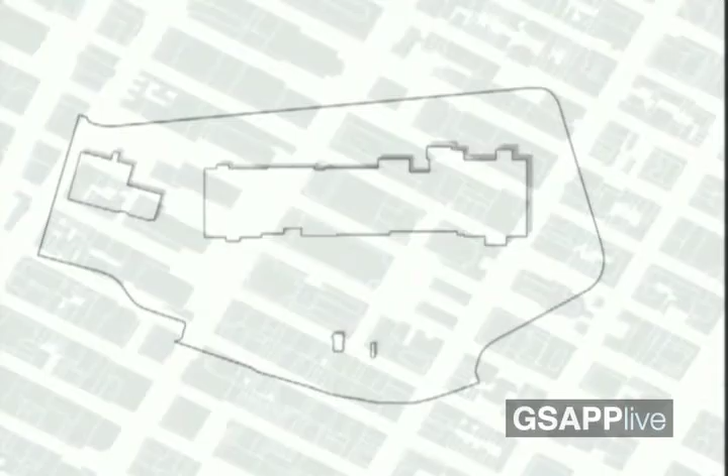But it was never really successful for a number of reasons, having to do with the micro-location of this mall in relation to a highway exit. So it kind of floundered for a while and then closed its doors in the 1990s. When we entered the picture in early 2004, the owners of this building, New York City-based developers, freely admitted that they were land banking - meaning they claimed the property for tax purposes, as a write-off, and were fine with just waiting and having it sit there, not doing anything. It was obviously perceived as a problem for the community to have this very large, prominent site sit there, dead, nothing happening with it.

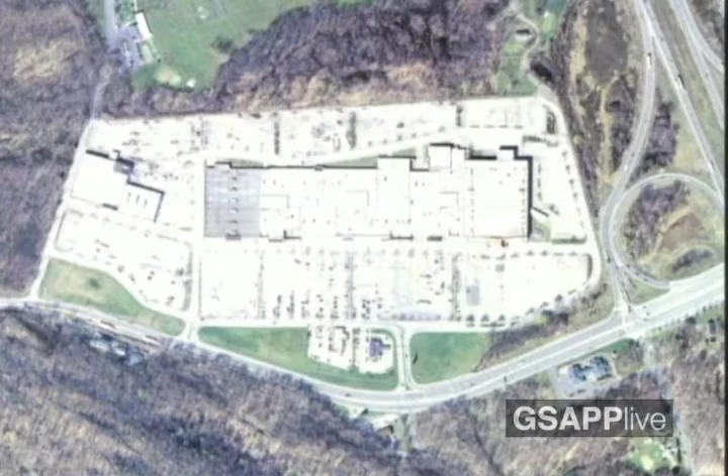But when we started looking at this property, we decided not to be critical of land banking, but to accept it as an opportunity - to look at this period of nothing happening as a time where other things, the space, can be a temporary location for other unplanned programs to take place in the meantime.

In fact, hanging out there a lot in the parking lot of this mall, we soon found that already there were a lot of unplanned things happening there - like this bus service serving the supposedly dead mall, somebody waiting for a bus here. Another bus stop that also doubled as a dry cleaning business, toilets in the parking lot, RVs, rigs, homes, other miscellaneous activities going on. And then this guy who was mysteriously riding around his golf cart picking up trash.

There goes a hot dog truck. And then on the weekend there was this amazing flea market going on in the parking lot, but also in the repurposed anchor store here - this is the KISS memorabilia stand you see there.

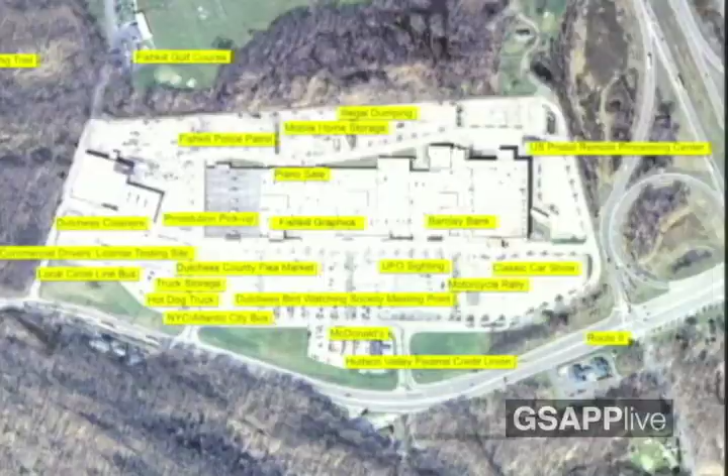We started mapping all these activities we found there, and then diagrammed the different rhythms of the mall, starting with the picture of health when this thing was fully operational. You see a pretty good, even heartbeat there on the electrocardiogram.

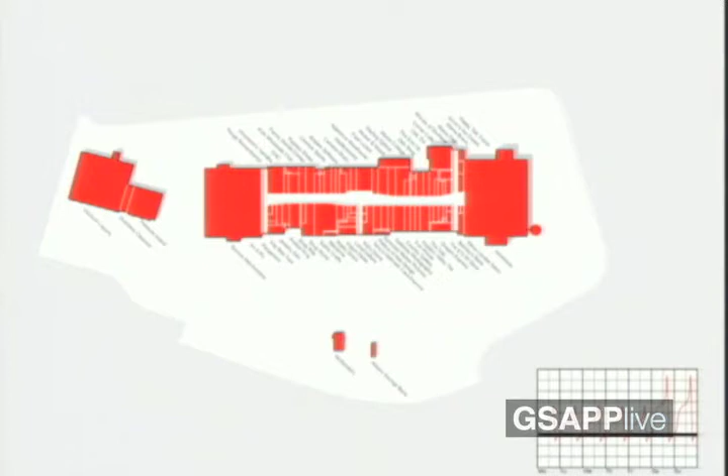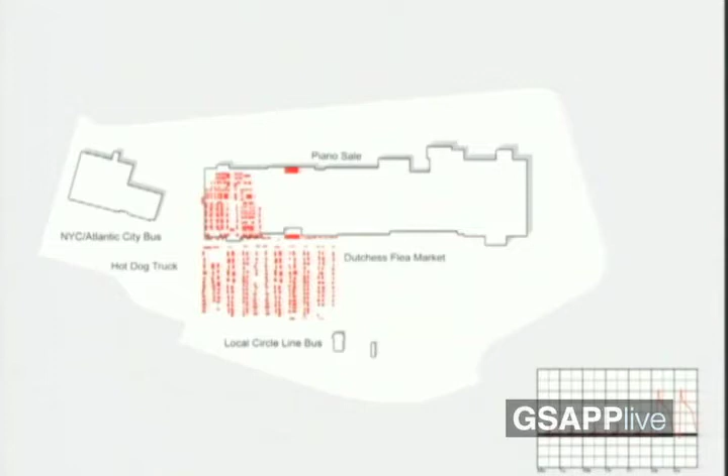Then we mapped current programs - pretty weak pulse, just very few businesses left. And then we looked at the temporary programs, this flea market, and you see how it picks up there on the weekend. We also mapped the illicit and illegal programs going on here, and there's no telling when they occur - so this is total arrhythmia that you see in the electrocardiogram.

After looking at this from afar, we identified people, local constituents, people who use the space and have some interest in it, like this guy who runs the hot dog stand. He notes that the mall parking lot had become a sort of makeshift truck stop, so truckers pulled in and spent the night there, and he set up his little hot dog business to sell them food - he started a little business out of the conditions.

So we talked to him, and to a lot of different people, both on-site and off-site - developers, different interest groups, and so on. This was really not so much about romanticizing the everyday practices, not to only have this sectarian view of the place, but to really understand all the actors acting on this site, to get a full picture of who's a player here, either on the larger scale or the smaller scale.

We really saw this as a kind of good thorough detective work, right? Interviewing people, but also just listening, hanging around, looking for clues, and suspending judgment as long as possible to get some situated knowledge, to understand the site.

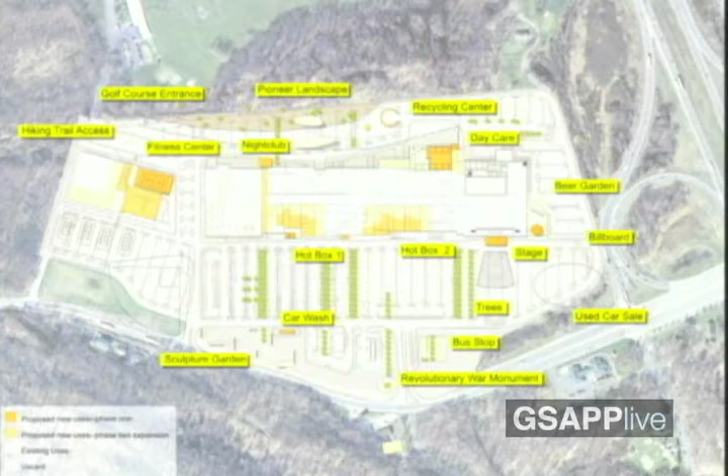I'm not going to walk you through them, there are a lot of these proposals. Some of them are really very short-term, cheap interventions to help this use during this temporary phase, the land banking phase - like basically office infrastructure for small businesses to colonize the structure, the mall structure from outside in.

We saw there was a graphic design business that started doing that, and we thought this would actually be a very useful, very cheap intervention to help that kind of colonization of the structure from outside in - cheap stuff that tries to intensify existing dynamics to get some sort of use out of it.

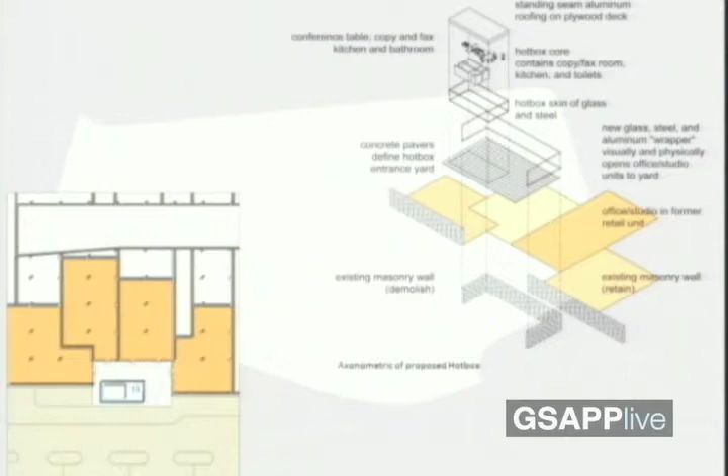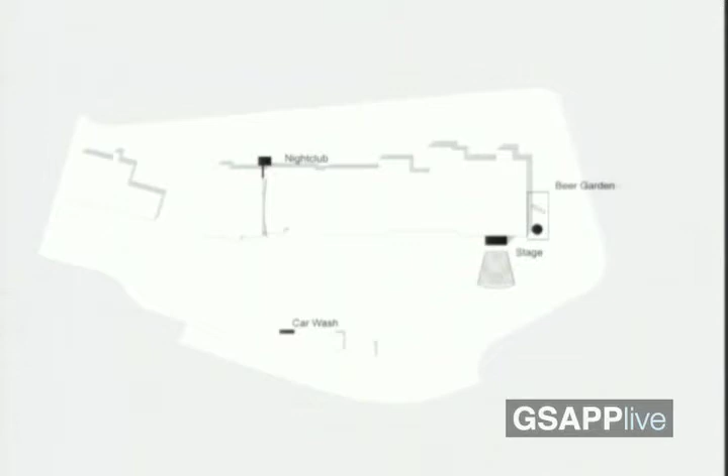There were other proposals that were just capitalizing on the temporary mess, or exploiting this temporary mess, like a nightclub and things of that sort, that just took advantage of the fact that there are no neighbors around here.

And then a third group of proposals that were building on this sort of casual, mainly car-oriented community uses around there - there's an existing drive-through McDonald's, an existing drive-through bank, and so on. So we added, enriched these kinds of everyday programs.

But again, many of those proposals were designed for the limited period of land banking, a couple of years. And our thesis was really that this sort of in-between time sometimes allows programs to happen, but also buildings to happen, that otherwise might not have a chance - under normal conditions, these things might never happen.

And these things that happen in the meantime can also disappear after the lab phase is over, so to say, but they can also influence what happens after this experimental site - they sort of can change the DNA of a site. And so from there, we move to the next project with that thought in mind.

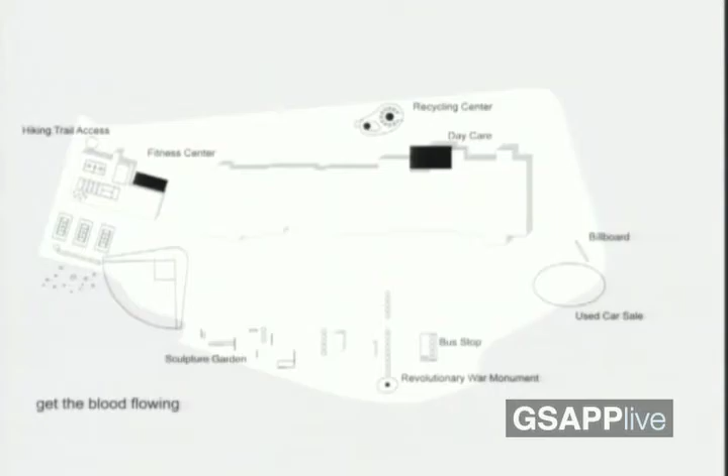So the next project is Lent Space. It's the temporary sculpture park in Soho that Gavin mentioned earlier. The site might be familiar to many of you because it's a full block, as you can see here.

The landowner's problem was that the site was zoned for manufacturing, so there had to be a change in zoning, which, as many of you probably know, in New York can be a very long and multi-year process. While the process to change the zoning was underway, the landowner thought that in the meantime, during this 3 to 5 year period, he might as well put some sculptures here and also incidentally get a tax break.

So the landowner approached the LMCC, the Lower Manhattan Cultural Council, a downtown arts organization that's quite active in the city. Probably many of you are familiar with it. The LMCC runs a number of initiatives, including Swing Space, a program that temporarily matched artists in need of studio space with vacant office space in Lower Manhattan.

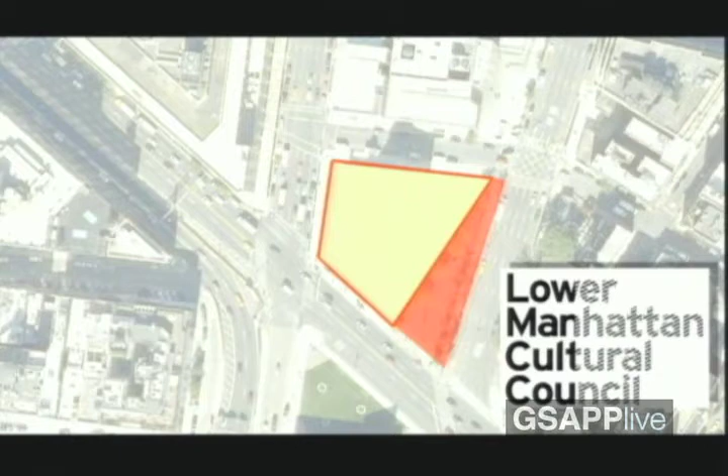Anyway, the LMCC curator, Adam Kleinman, a really brilliant guy, wasn't too excited about the idea of temporarily decorating a development site. But nonetheless, one day he called us and asked us to prepare an estimate for creating some gravel paths on the site to make it accessible.

We didn't give him a price for the gravel paths. Instead, we introduced him to our Dead Malls project, really to make the point that one could do so much more here than just putting down some gravel and a sculpture. Here was an opportunity to pull off an interesting project in the meantime, an opportunity to use a niche in time to introduce a project and a program that just wouldn't have a chance in this part of the city under the current conditions of ownership and with the current realities of land values.

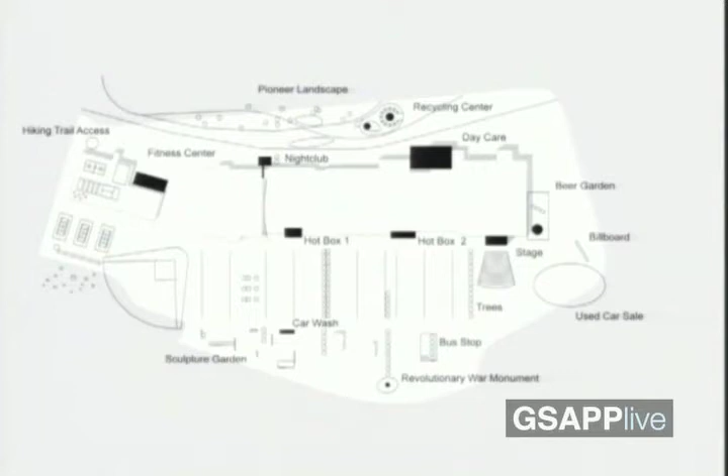So as Tobias mentioned before, our Dead Mall project here really had a funny afterlife. It really lived on in theory and in practice, and we used an in-between time to incubate new programs and new forms of public space. So we somehow together turned this project into a temporary public space, plus performance space, plus sculpture park, plus tree nursery. Sounds a little complicated.

So here's the site. Next to the site here, you see this little plaza. It's called Juan Duarte Square, named after the founder of the Dominican Republic. You do know that 6th Avenue is kind of the Avenue of Americas.

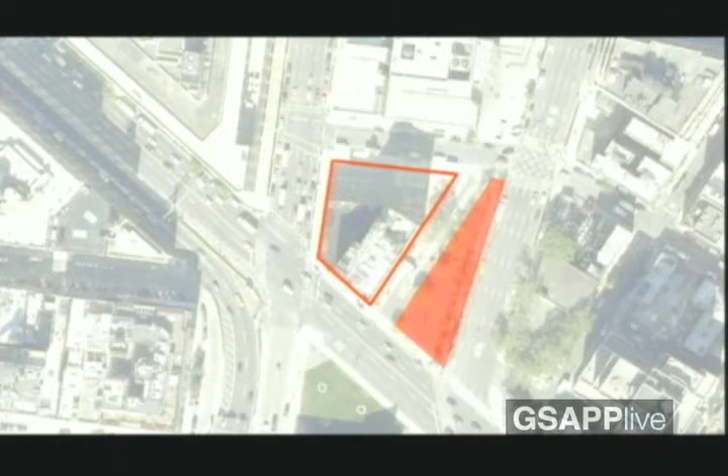And in between, there's actually this little street that had recently been demapped when we started the project, meaning that although it looked like a public street, it no longer was one. So it somehow actually belonged to the landowner. We're still not entirely sure how you buy a public street in New York City, but it can be done.

A problem that we encountered at the beginning of the design process was that the landowner insisted that the site had to be fenced in. This was basically a legal requirement related to the landowner's insurance. And while generally they were very open to our ideas, there was absolutely no question about whether or not to have a fence. This was a huge problem for us because, as you might imagine, with this fairly small site and a few sculptures inside and then this big fence around it, it seemed a little weird, like some kind of art zoo. Also, the budget was such that a new fence would have actually killed most of our budget.

So after fighting against the fence for a while, we actually decided to make it the most important element of the design, and design a fence that would be permeable and active, a center of activity rather than a border, an object that blurs the boundaries between inside and outside.

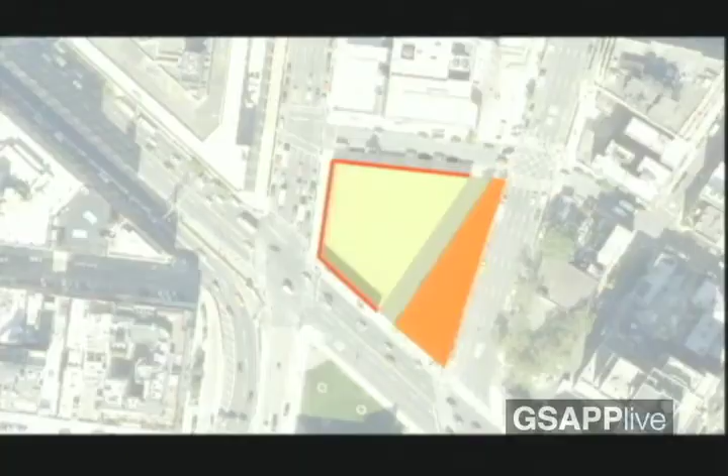So we decided to keep the existing clearly provisional chain link construction fence on 3 sides, and facing the sidewalk toward Duarte Square and the demapped street, we basically got rid of it. On this side, we replaced the construction fence with a new element pulled back from the curb of the street to the old building line, constructed out of marine grade plywood, a material clearly different from the chain link and suggestive of furniture.

And we made it operable. We made it possible for people to actually move the fence.

So here you see the diagram. It's actually a little light, I hope you can read it. When the fence is closed, all 3 sides have that chain link fence, and this wood wall is facing the square as a kind of facade or billboard, giving an address to the project, a street address on a demapped street.

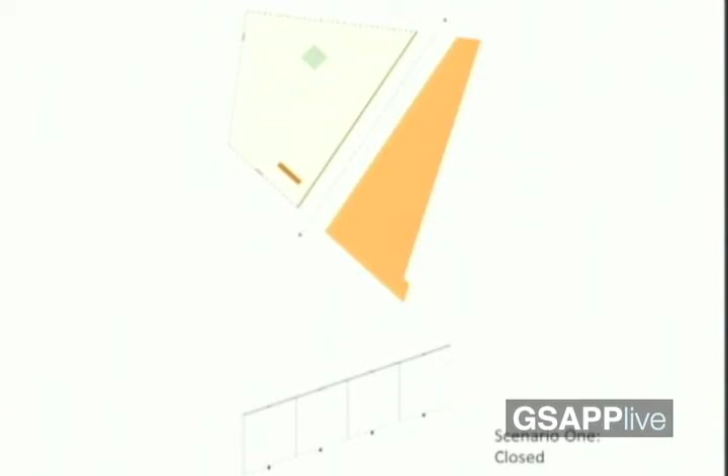And here's the fence on an everyday basis. Some of the fence elements are open to allow these kinds of shortcuts through the site between some of the workplaces and subway stations and so on.

And here it is with the entire side open, blurring the boundary between public space and the privately owned public space, and also creating a series of compartments, these kinds of small gallery spaces.

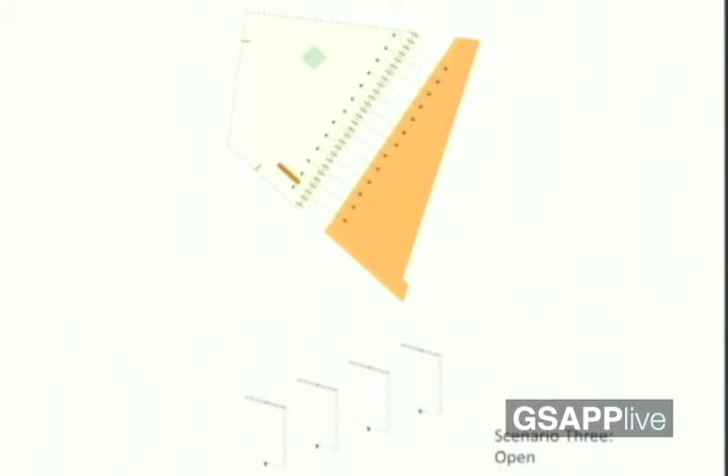So here you can see it in action. We just opened one door. We actually made a bench on one side of the fence, making the object a little more public in that it's no longer clearly identifiable as one thing, like is it a fence, is it a bench, but something that can really be used or appropriated in a number of different ways.

So it could be used as a larger sitting space. You can also move them a little closer, or have the bench face inside or outside. That's Adam Kleiman, our client.

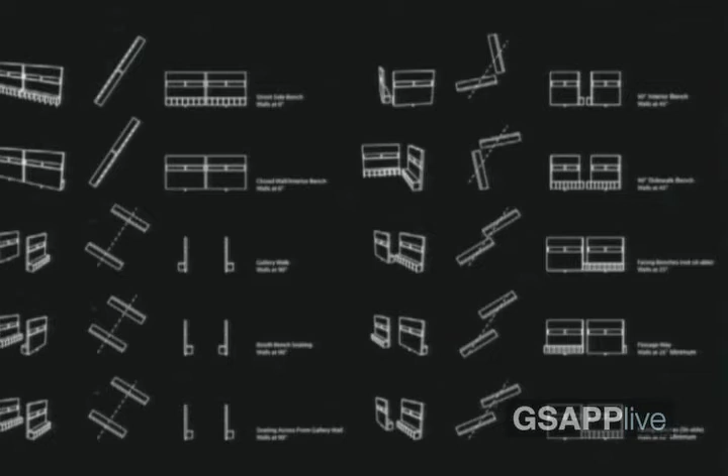Or open the whole thing up. You can see now when those doors are perpendicular to you, it almost dissolves and disappears. In addition to being a fence, it can now create all kinds of social spaces for people to hang out and to sit and to play.

And then these boxes are actually a movable park and tree nursery. What we realized at the outset of the project was that in order to create some use value for the many people who worked in this area, this place really needed some shade trees and generally some vegetation. But it seemed wrong to us, as it was a temporary project, to plant trees and then after a couple of years just tear them out and throw them away, right when the trees would have grown and be big enough to produce some nice effects.

So we started working with a horticulturalist to see what would be the right way to plant trees. We learned that if you want to plant trees and then move them after a couple of years, it turns out that planting them in boxes like this actually works best because the roots are confined. And then we got a couple of trees donated by the Parks Department.

The Parks Department also taught tree planting workshops on this site as part of the so-called Million Trees campaign. In addition, we tried to find ways to densify the park by borrowing trees, by providing a tree nursery, so small trees were to grow on the site for a year and then be moved out to become street trees. The idea of temporarily storing or borrowing trees really made a lot of sense to us, given the limited lifespan of the project.

Okay, so now we would like to talk to you about Holding Pattern, our PS1 project, MoMA PS1 project. Most of you probably know, but for those who don't: every year, MoMA PS1 commissions an architecture firm to design and build a setting for big Saturday afternoon parties called Warm-Ups. The program essentially provides seating and shade for the 6,000 or so visitors that come to these events every Saturday between June and October. You have to build everything yourself in 4 months.

This would probably be a good time to point out that you're hearing from the 3 principals of Interboro here, but projects like Holding Pattern couldn't happen without a lot of help. We had an enormous team of amazing volunteers for Holding Pattern. We can't mention them all, but we'd like to acknowledge Rebecca Beyer, the project manager, Andrew Costello, Janessa Fry, Trevor Lamb, Kathleen Cahill, our graphic designers Thumb, structural engineers Buro Happold, and illustrator Lester Gonzalez.

So back to Holding Pattern. It's a temporary project, and here are the warm-up parties — I'm sure many of you have been to some of them. When we first started to think about what to do, we started to think: what happens to all this stuff when the project is over? Does it get thrown in the garbage? So our first thought was, it probably makes sense to recycle.

Might there be a design? Could we design and build something that could be put to a different use once Warm-Up is over? The second thing we thought about a lot was that PS1 is located in Queens, which is the most diverse, the most vibrant, the most exciting part of New York City — maybe one of the best places in the world, we'd argue. MoMA PS1 does a great job of doing outreach to the neighborhood, and people who live there get to go there for free. But on some purely architectural level, the 16-foot concrete wall that surrounds the courtyard can be perceived, especially by people around it, as something that's not entirely welcoming, right?

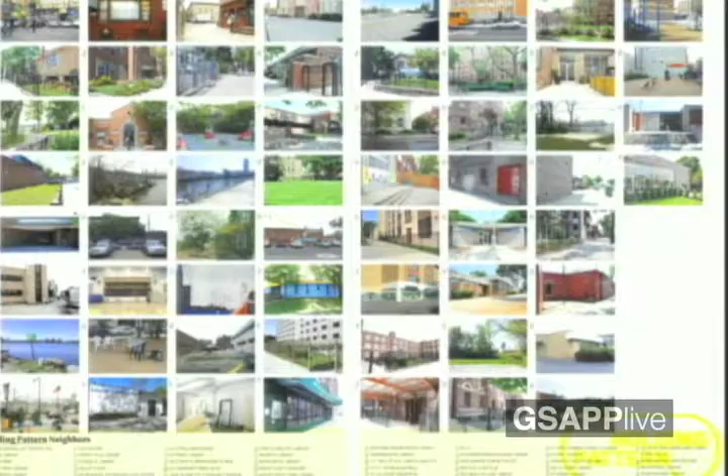At the end of the day, these are the objects, this big collection of stuff: trees, lifeguard chairs, stages, ping pong tables, rock climbing walls. Here are some pictures, and this is actually a picture of every space that's going to be improved by stuff from Holding Pattern. There's over 60, and here's a map of where everything is going to go. By the way, tomorrow is the day we're going to deliver all of this furniture, the rock climbing walls, the lifeguard chairs, everything to the neighborhood.

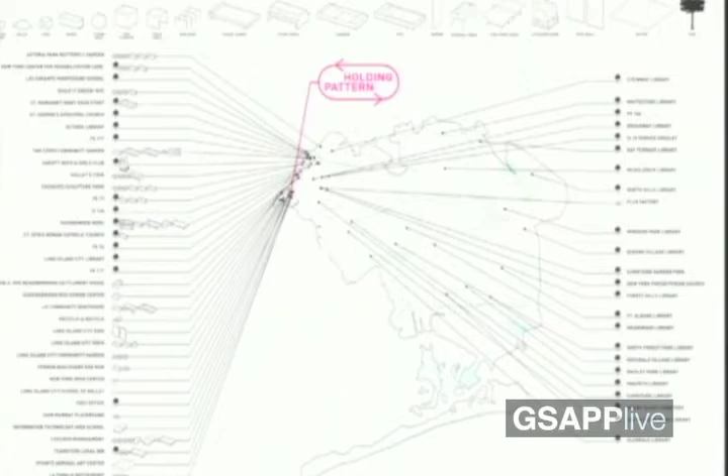Just to give you an example of some of the spaces, you'll notice there's a lot of trees, a lot of people wanted trees. So here are some of the spaces we're going to improve with trees. We partnered with the New York Restoration Project, and they generously offered to help us deliver and plant trees in places like the New York Rehabilitation Center, these kind of barren parking lots. In some ways, the project is really a neighborhood improvement project, which is how we like to see it.

So this is an illustration we developed to represent the project. Here you can see the museum, the old school building, its courtyard, which you're probably all very familiar with. We show this in the context of the neighborhood, and we think of the project as having three phases.

The first phase is when people ask for stuff, as Dan mentioned. We quoted these requests here in yellow, so for example, over here you can see we need ballet mirrors for our expansion, or we could use a stage for our b-boy workshops. In the last phase, the furniture and other stuff requested by different organizations goes out to their owners, so to speak, which, as Dan mentioned, is going to happen tomorrow. This future phase is shown by these little clouds. For example, up here you can get a glimpse of the mirrors in use by the Long Island City School of Ballet, and over here is the b-boy stage in use on the roof of the 5 Points building.

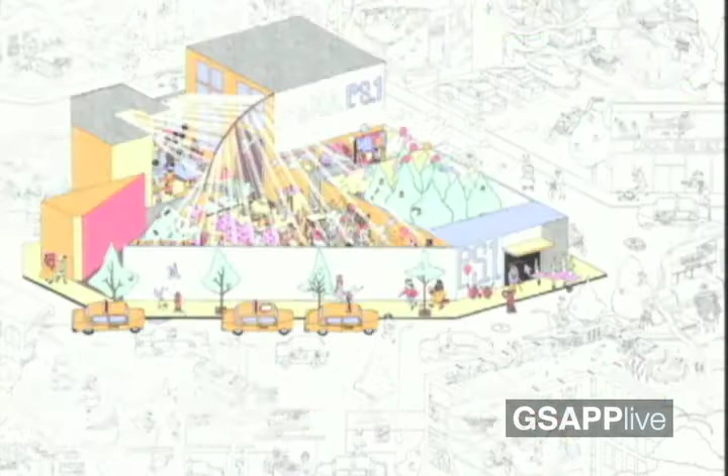And then this is what happens in the meantime during warm-up over the summer. So all the stuff, the trees, the furniture, the mirrors, and so on, are used in the courtyard.

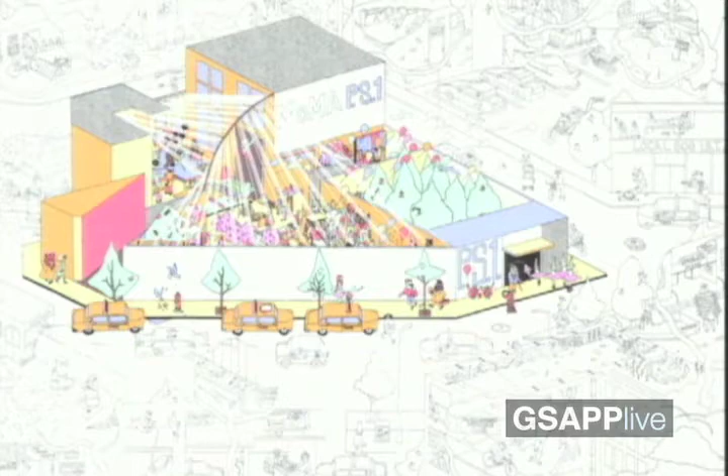With this approach, we radically expanded our client group from one client, the museum, to 50 clients that included the ballet school, 5 Points, the Boys and Girls Club, and so on. Holding Pattern really operates like an urban design project, developing an environment that responds to multiple, very different, and sometimes changing desires, something that a fixed piece of architecture could never do.

We sometimes liken our approach to that of the Iron Chef, of the beloved franchise TV show, as the Iron Chef is given a bunch of ingredients and under tremendous time constraints, and under the careful watch of a live audience, is challenged to make an amazing meal. We worked with a set of materials and objects selected by others, like the mirrors and the trees, and sought to make an interesting environment.

We used straw bales to create planting beds and backfilled them with mulch. We planted the trees in a grid, but the planters are organized more like a maze, evoking more traditional hedge gardens, and the feeling and smell of the space is very distinct, damp and organic like a forest.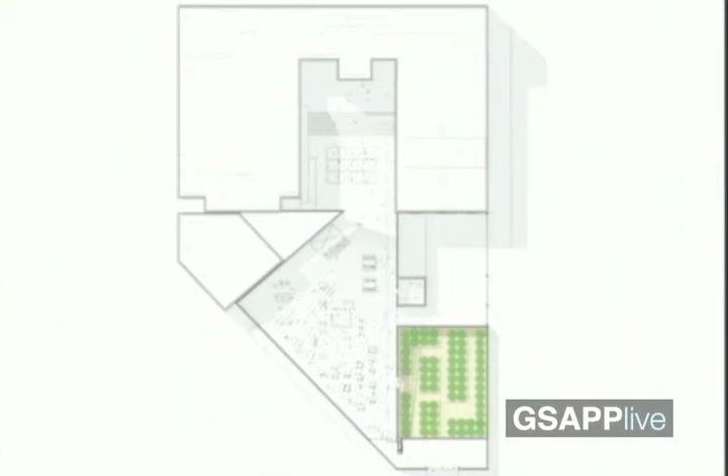And then onto the main courtyard, the largest space, which Barry Bergdoll referred to as the public rec room. This is actually a funny photo, taken at the threshold between the tree room and the rec room on the left.

This is where most of the items are placed and where people interact with them, like the stools, the picnic tables, the bike stand, and the ping pong tables. The majority of these pieces worked kind of like a family, although we did buy a few pieces off the shelf, like those ping pong tables.

And here you can start to see it all being used. We developed a labeling system with the graphic designer's thumb, our frequent collaborators, and each item got what we called a museum label describing the piece's so-called provenance. That was coupled with a grid showing where all the items go, and we just used a black marker to circle the final home of each piece.

We also created these 'hold for' tags to make visible that these pieces were being held for someone else, and we used a branding iron to burn in the Holding Pattern logo. You can see the space filling up on the warm-up day.

The Mies-inspired chaise lounge, the misting stage, the lifeguard stand, the rock climbing wall - actually really popular with that age group, incredibly - the sandbox, the chess tables, the foosball table. We also had 24 purple leaf plums in the main courtyard that we put in containers.

And so here you can see it in full action, with the furniture being appropriated and moved around in all different ways. So here you see the project being used primarily by two audiences, the museum audience and the warm-up audience. But we also invited organizations in the neighborhood we worked with to make use of MoMA PS1's courtyard for programs of their own making during the summer months.

The events included b-boy workshops, ballet workshops with the Long Island City School of Ballet, readings with the Queens Library, a senior citizen summer - oh, that actually we didn't do, excuse me.

Quilt making workshops with the New York Irish Center. So Dan mentioned Eric of the Long Island City School of Ballet. Here he is in the studio. You remember he needed mirrors.

So here are the mirrors in the installation, and here's a photo from the event we co-organized with him called A Brief History of Dance. And that's actually where the mirrors will go.

Queens Library did a series of readings. You can see here the quilt making workshops with the New York Irish Center, the bike repair workshop. And then just yesterday, we had the Long Island City Neighborhood Expo, with a number of different neighborhood organizations involved.

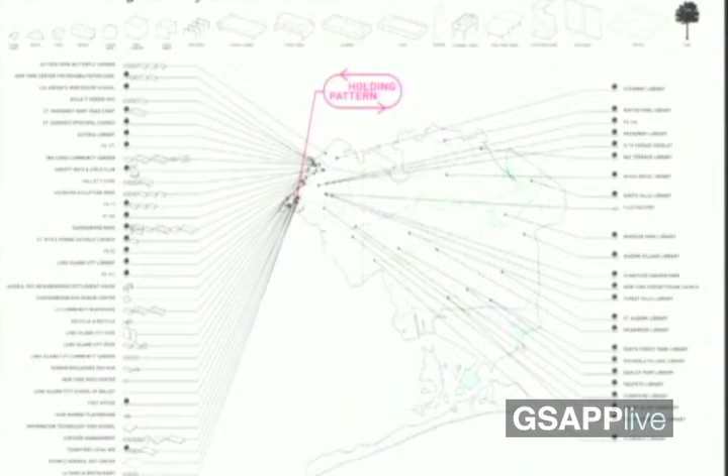Lastly, we developed this newspaper, again in collaboration with them, which introduced our clients and their organizations, and showed what they asked for and where it's all ultimately going, which will happen tomorrow. This free newspaper was available at the museum, so visitors could learn more about the project, but it was also distributed into the neighborhood, to open the museum to the outside and blur the boundaries between it and the surrounding neighborhood. Here you see some images of those pages.

Last but not least, let's talk about the structure. As you probably know, the courtyard of MoMA PS1 gets extremely hot in the summer, and almost the only programmatic requirement for GSAPP is to provide some shade. To do so, we devised this canopy structure.

It's a simple and inexpensive, albeit kind of accidentally heroic structure made out of ropes and fabric, polyjute, which is a lightweight landscaping fabric. And it has this funny shape.

It's not something we designed out of the blue, but it's derived from the courtyard as it is. Part of what makes warm-up events so interesting is the eccentricity of the courtyard. It's sort of a weird party, and part of that weirdness has to do with the oddness of this courtyard—the fact that the best seat in the house is basically the terrace of the neighbors who are planting their tomatoes up there is somewhat strange, for example, among other eccentricities in the architecture of the courtyard.

So when we started thinking about how to provide shade for this situation, what we didn't want to do is place a beautifully designed object within this strange courtyard, maybe a piece of architecture that might get into people's way. You saw the courtyard layout with these pieces of furniture, very much about interaction and people moving stuff around, so we didn't want to get in the way of that, and we didn't want to touch the ground.

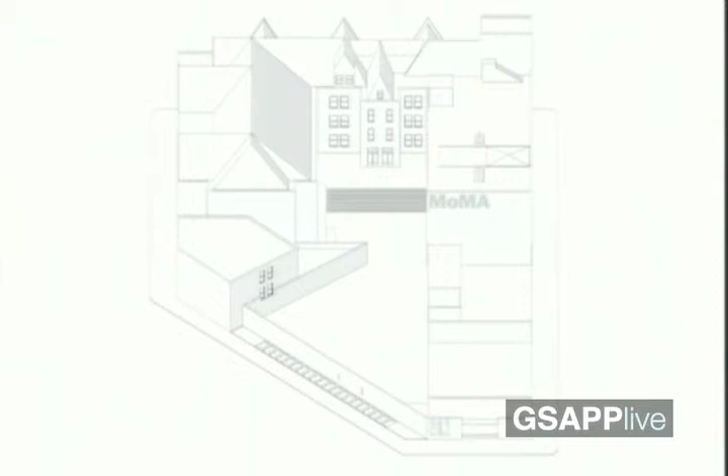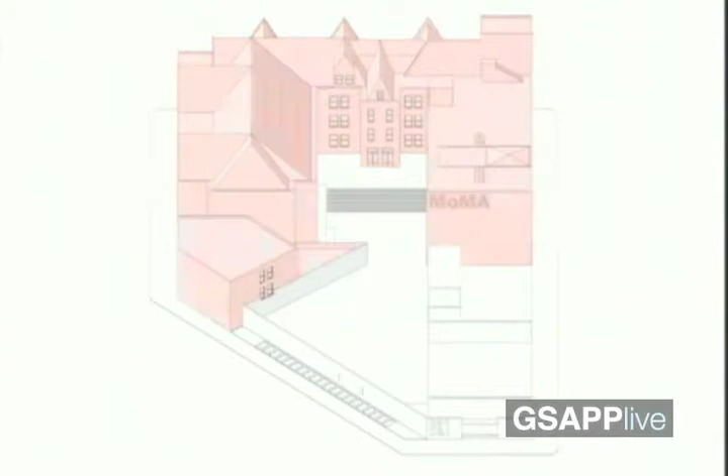So what we started doing is really just connecting the edges of the courtyard as it already is. The funny shape of this courtyard really wasn't anybody's design decision, but the result of many circumstances and decisions over the years. You just see here the grid, which is cut off at this corner by Jackson Avenue. There is the old school building, and there is this neighboring parcel that sticks right into the courtyard with its terrace.

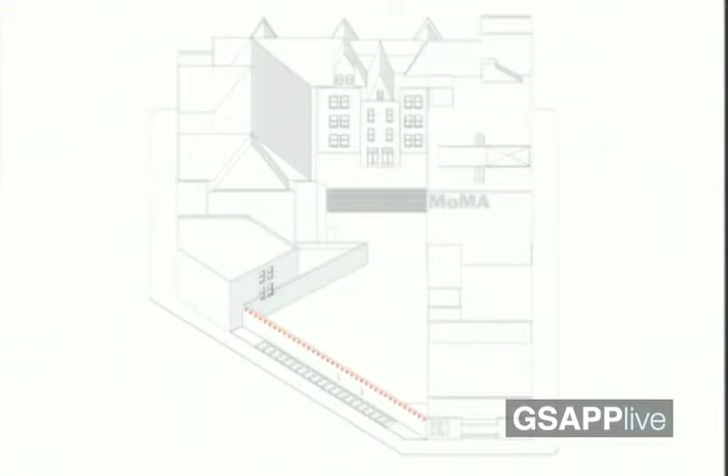And again in the 90s, there was this decision to put up this 16-foot wall around the courtyard. Actually, in this wall there are open holes, 38 holes, two feet below the top edge of the wall, from the concrete formwork. We decided to thread ropes from these 38 holes over to the building itself, just as the simplest way of providing a roof for the entire courtyard.

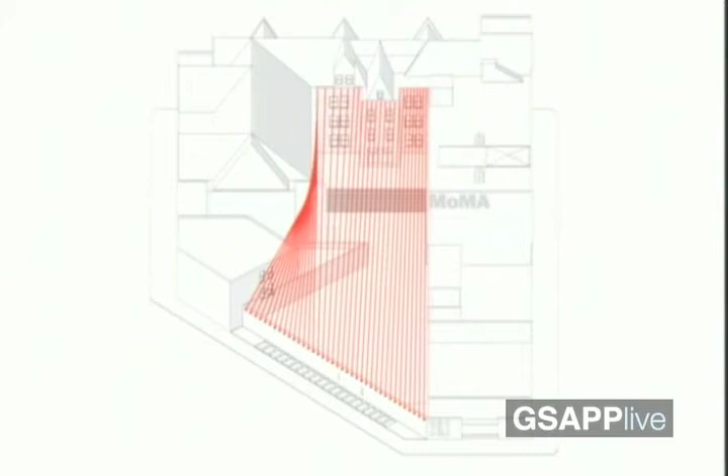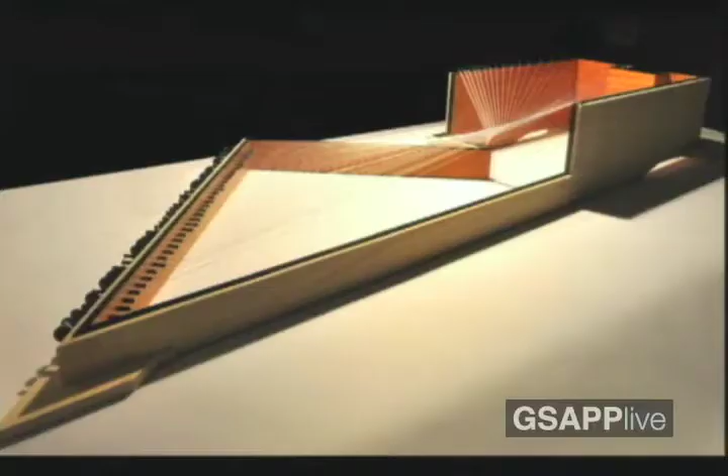Obviously we didn't want to put a roof over the neighbors, so we had to pull that in at that point, resulting in this shape, this hyperboloid surface that is directly developed out of the edge conditions of this courtyard. Here you see our first model, the harp, just bringing these strings across from the edges of the courtyard. This is a rougher working model we had going, but you see in this image the beauty of this shape, a sort of 50s aesthetic that came out of this simple operation of connecting the edges. We really like this shape in that it's made out of lines—little bit sagging lines now, but in the model, straight lines.

It's made out of lines, and it has this hyperbolated surface, which isn't the result of some algorithm, but simply connecting the edges.

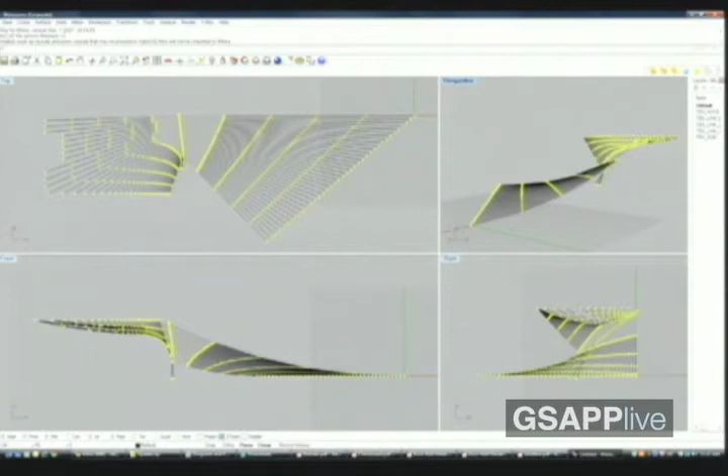This was actually the parametric digital model that we worked on with our structure engineer. It was an interesting challenge to find the right tension and the right placement of these ropes. The edge conditions of the building can have different loads, and each rope, as you can imagine, has different length. So a parametric design came in very handily to do this.

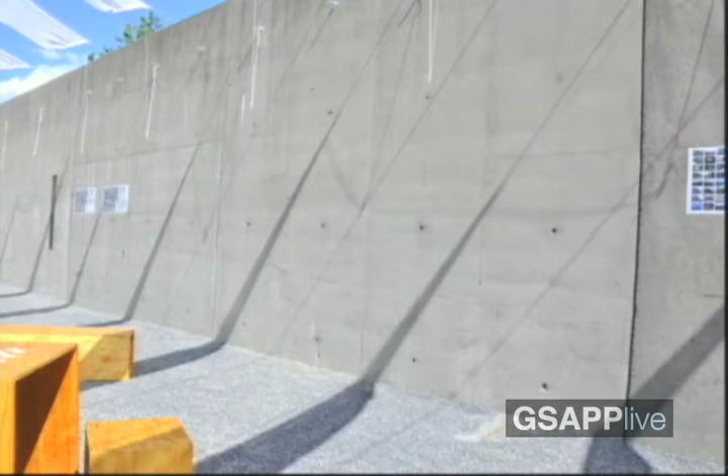So there's this little hint of what happens on the inside on the outside wall along Jackson Avenue here, over these porta potties—you see a little bit of what's going on in there. Here they come across over the wall, and there you see the fins that are attached to these ropes.

But then the fins, the ropes come out on the inner courtyard side of the building and go across to the parapet, which you see here. This is a photo from the roof—you see the bridge down here, and then the ropes going up to the parapet. You see the railing there.

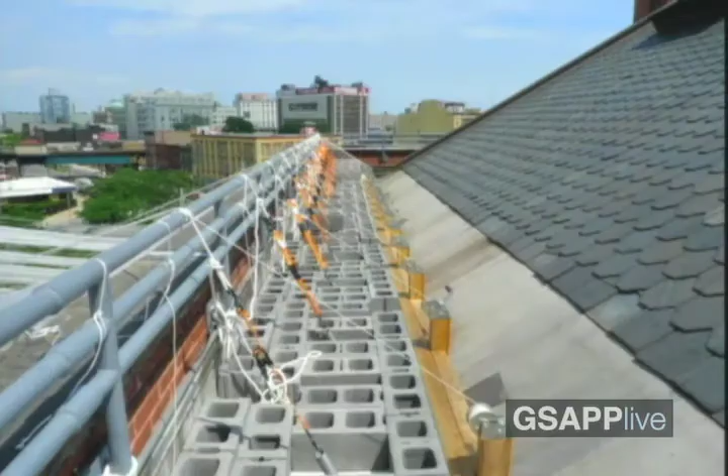And if you keep that in mind for a moment, here you see what's happening behind that railing. The problem here, or one of the conditions for the design, was that we couldn't attach anything permanently to the building, since it's obviously a temporary project.

So the way these ropes are held in place is through ballast, right? You see the rope coming over the railing here, and then it's tied down to a very long wood platform that is weighed down by concrete blocks.

So it's really just using the snow load, right? The roof can carry a certain snow load, and since this thing is only temporary and only happening in the summer, there's not going to be any snow, so we can use that snow load with these concrete blocks.

And then with the innovation of making these fins retractable, you see also this other rope on which these run, and then it goes to this device here. So you can imagine us with Hurricane Irene approaching, standing here like the sailors on top of the Colosseum, crazily retracting these fins. That's it.

This might be stuff you guys already know, but for the people in the room: in 1997 in Queens, Fred Fisher the architect added the 16-foot wall around what used to be a public school in Queens, for PS1, which only became known as PS1 in the early-mid 90s under the directorship of Alanna Heiss.

In the same year in Berlin, 1997, Alanna Heiss and Klaus Biesenbach, a curator in Berlin who is now the director of PS1, went to a party in Berlin, the Young African Artist Market, YAM, that was basically a play landscape on the banks of the Spree River where you could drink and drug and park your kids and basically party for 3 days straight.

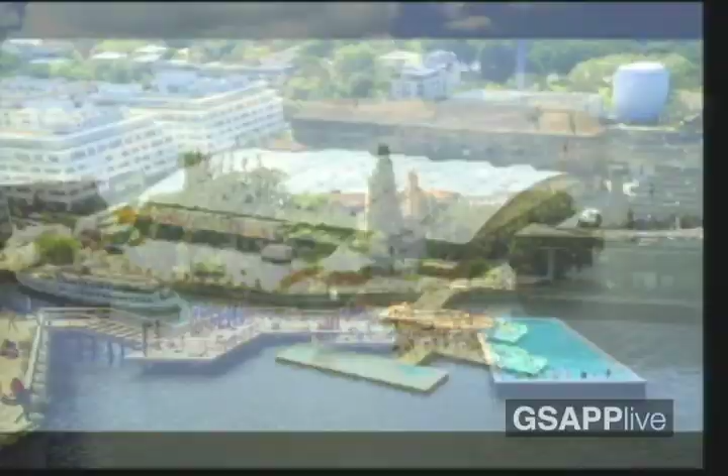But it also had this architectural quality to it. There was a group named Peanutz, with a Z, who designed the space. So it was interesting for Chris and I to see that there was actually a precedent where it was residing in a kind of party, but also an architecture of that party.

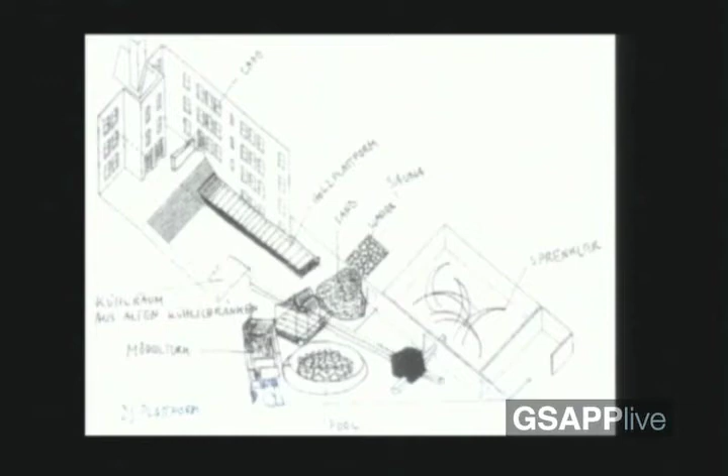In Queens in 1998, Alanna Heiss and Klaus decided to bring the idea to PS1. So they invited the Viennese artist collective Gelatin to do a project called Percutaneous Delights. To quote Klaus: there were requirements of shade, cooling, water, entertainment, drinks, possibly children's daycare, but all of this was basically obvious.

So when we worked with Gelatin, the artists in '98, what they did was made an igloo out of fridges. They made a room where all the fridges were attached, and the interior was just the space between the fridges that was cold. They made a sun tanning pad, which was just aluminum foil, so you were lying on the sun being reflected onto you.

It was crazy. I think they did something which was basically a dark room for people having sex, but they kind of didn't say that. They made this huge tower out of office furniture. I don't want to exaggerate, but it was at least 60 feet high, end quote.

And it was also the kickoff of the first Warm Up series, which in 1998 was a month-long series of world-famous DJs coming to this kind of party environment, all done on a budget of $10,000.

The next year, 1999, PS1 and MoMA started their relationship, and this quote is taken from a conversation between Alanna Heiss and MoMA director Glenn Lowry at PS1. From Alanna Heiss: at PS1 we don't intend to start collecting, and scholarship in itself is not going to become a primary goal. By merging with the Modern, perhaps those issues can be utterly avoided, and we can use the magic, the spaces and halls of PS1, to house the contradictory and spontaneous results of the creation of art.

I just wanted to highlight that because we'll get back shortly in our interview into the idea that PS1 is a kind of space that has more flexibility to traffic in uncertainty.

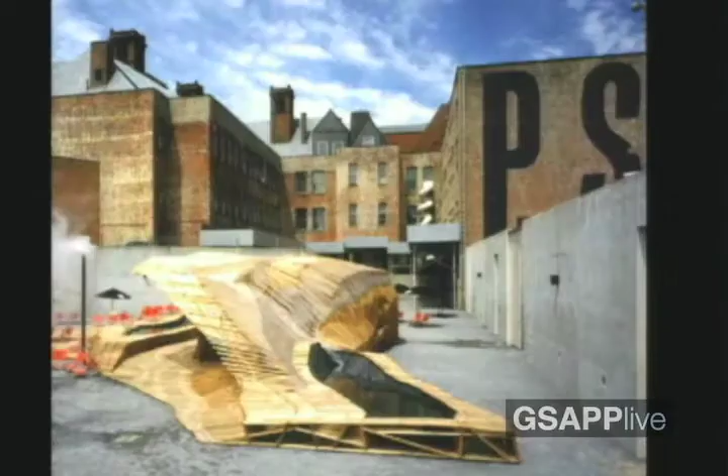So the following 12 years, which we're now just closing up, from 2000 to 2011, we'll just skim through really quickly to give those of you who aren't familiar with the archive a sense of what has gone down over the past 10 years.

The first year was Dunescape by SHoP Architects when they were kind of a young upstart, and now they're a firm of, I think, almost over 100. Lindy Roy, who was teaching here at one point and might still be, in 2001 made Subwave. In 2002, William Massie's Playa Urbana.

In 2003, Tom Wiscombe and Emergent did Lightwing. In 2004, nARCHITECTS, who some of you might have studio with. In 2005, Hernan Diaz-Alonso, a graduate of this school, did SUR. In 2006, Obra Architects did Beat Fuse. In 2007, Ball Nogues from Los Angeles did Liquid Sky. In 2008, Work AC did PF1.

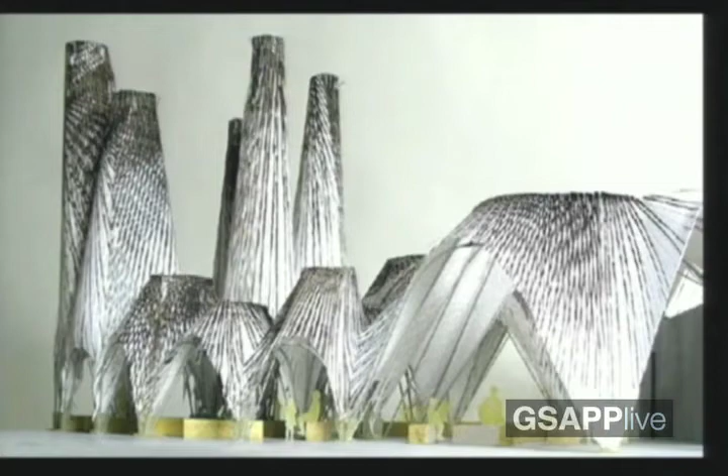In 2009, MOS, including GSAPP faculty member Hilary Sample, did Afterparty. In 2010, SO-IL did Pole Dance, and of course this past year you've just seen from Interboro. I'm actually not sure now if this is the rendering or a photograph.

But one thing we tried to do in our research project, and I promise this is only 3 more slides, is to not just look at the 10 winners, but to open up the entire field to understand what is the kind of group that was operating over the 10 years. So there's actually at this point 58 would-be projects and 12 realized.

But one thing we also want to underscore in the project is that at the base, even though some of the most innovative architecture over the past 12 years in New York City and around the world has been incubated at PS1, at the base of it is still a kind of party. So, as Chris would put it, architecture throughout the last 12 years has been, in some cases, in harmony and, in some cases, at war with the party.

This is Hernan's project getting trashed. And actually, I believe Hernan had to go back multiple times and touch it up. Also, the party architects are not impervious to the party. For those of you who might know Amale from WORKac, you can find her on Flickr having a good time. You can also find other people having a good time in her architecture in 2008.

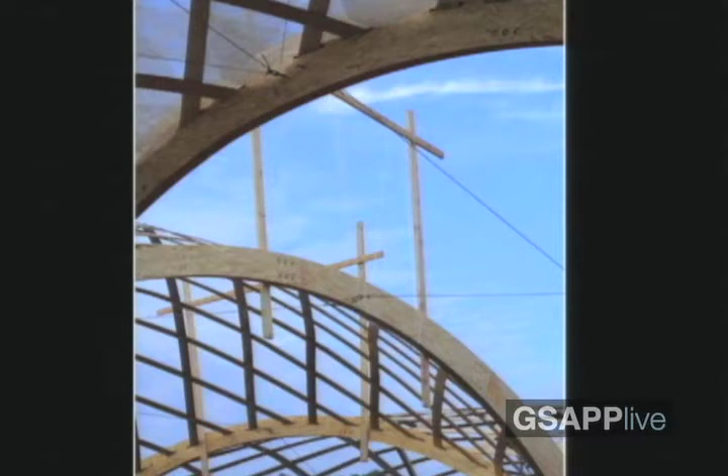Not only a party, but also a place for young architects to experiment and test things. This is Obra Architects, and I believe this is a photograph showing when their design actually got beyond the limits and failed just before going live.